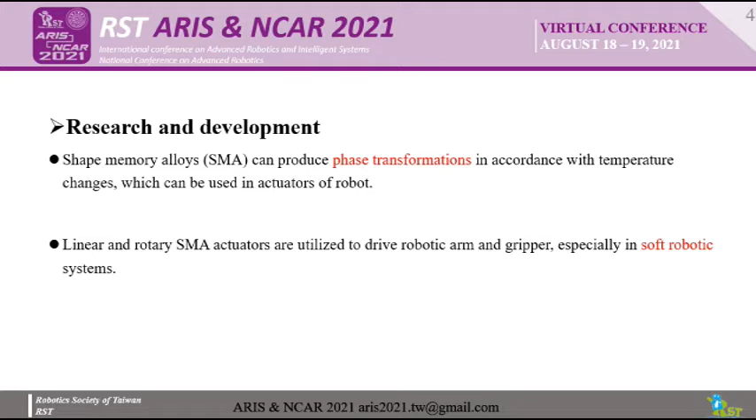Another aspect is education. In this project, students are not required to be familiar with any mechatronic system, not even any engineering field. Students need to build their own knowledge with a 3-hour-a-week lab course in a one-year project. This learning and research subject was initiated by students with proposals submitted on May 13, 2020. Students learned basic engineering knowledge under the detailed guidance of the advisor in the first 3 months. Finally, the project was completed in NCKU Optomechatronic Systems Control Lab.

Project of developing educational robot. There are 4 objectives of the project. First, explore the characteristics of SMA wire. Second, design and manufacture of micro-wire SMA actuators. Third, apply SMA actuator to a robotic system. Fourth, use Arduino and write programs to control the SMA robot.

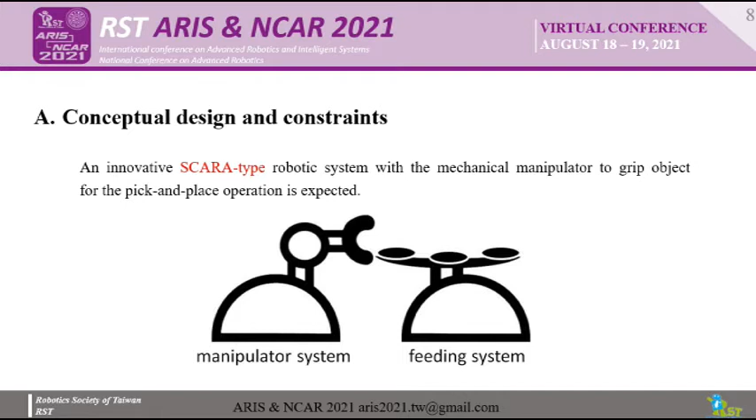About the conceptual design and constraints. Our innovative design: to decompose two-DOF rotational motion, so that pick-and-place operation can be realized by coordinating 2 independent rotational subsystems: the manipulator system, which consists of robotic arm and gripper, and the feeding system, as shown on the slide. Material constraints: available SMA wire, structural material by Lego blocks, and other materials.

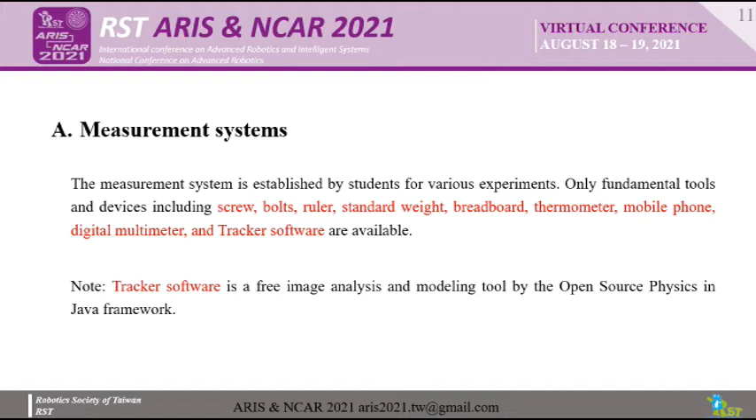Fundamental measurement. A. Measurement systems. The measurement system is established by students for various experiments. Only fundamental tools and devices including screw, bolts, ruler, weights, breadboard, thermometer, mobile phone, digital multimeter, and Tracker software are available.

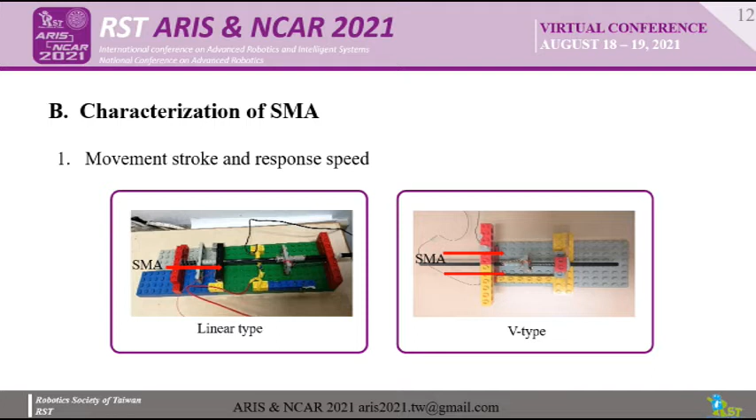B. Characterizations of SMA. First, movement, stroke, and response speed. We installed the SMA with bias spring in 2 different ways as shown on this page: the linear type and the V-type. It is found that the movement of the V-type will produce a larger stroke. In addition, the cooling time is about 3 times the heating time in the cycle of stroke.

Second, Young's modulus. For the relationship between the stress and the strain, the calculated modulus is 20.9 GPa, which is a result in the martensite phase at room temperature 24.5 Celsius.

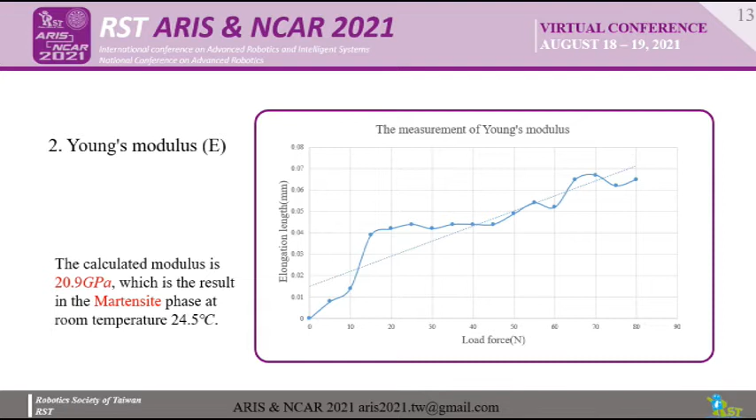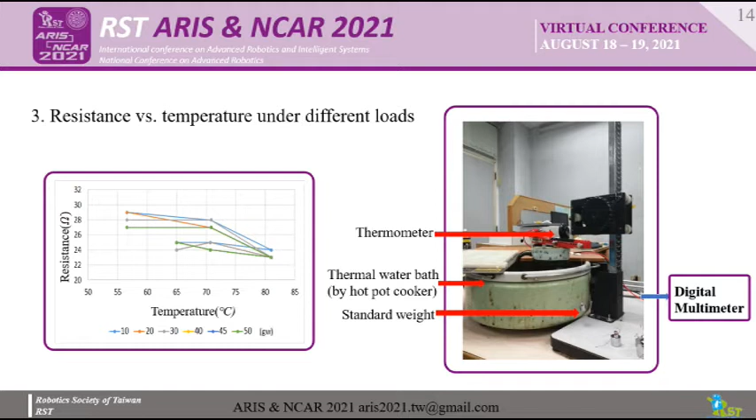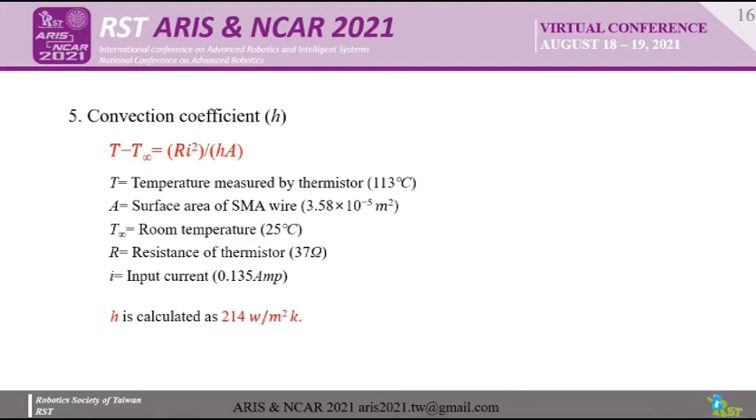Hi, I'm Wang, and I'll talk about the system design, testing, and conclusion. Innovative system design and development. The whole system includes the robotic arm and feeding system, as well as the gripper system. The first one is the robotic arm and feeding system. The structure and operational principle of the two systems are almost the same. Here, we use linear SMA and bias spring to rotate the robotic arm.

About the operation process to rotate the robotic arm. At first, SMA is heated by electrical power. SMA phase changes to austenite, and SMA gets shortened along with pulling a pulling string connected with SMA. The rotational motion is realized through friction force between the pulling string and the friction wheel.

Then, cut off the power supply. SMA dissipates heat and is elongated due to spring force. However, during one cycle heating and cooling operation, the rotational motion is limited to finite angles in a forward and reverse way. It cannot rotate 360 degrees. So, we need a mechanism to prevent reverse rotation.

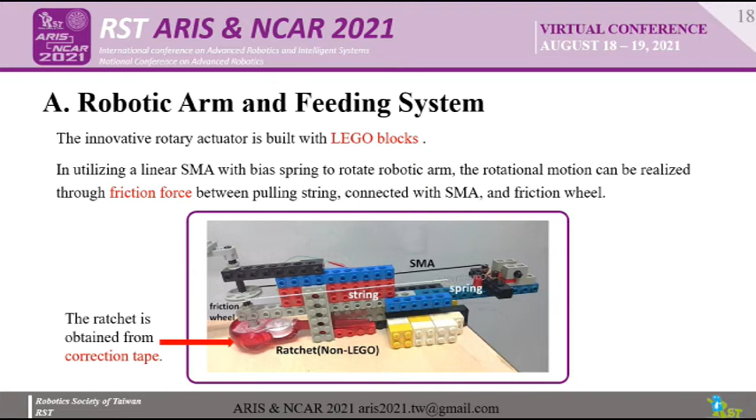An innovative approach is to utilize the ratchet mechanism obtained from correction tape and install it to the rotational shaft of the friction wheel. We construct the robot configuration and figure out both required torque and driving torque. According to Flexinol's specifications and experimental data of the spring, the maximum driving torque is calculated as 24.2 gram-weight by centimeter. For the maximum required torque, it can be determined and adjusted in realizing the robotic arm or feeding system.

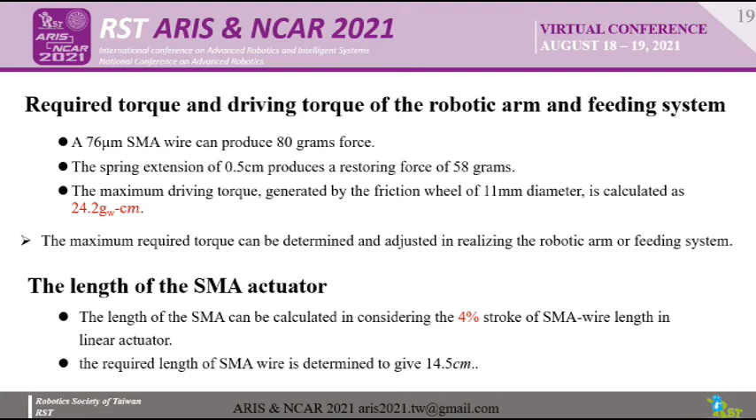About the required stroke, it is determined by the required angular displacement of the manipulator and the diameter of the driving wheel. The length of SMA actuator can be calculated by considering the 4% stroke of SMA wire length in linear actuator. The required length of SMA wire is finally determined to give 14.5 cm.

The gripper system. Use V-type SMA to drive the gripper. A normally closed gripper is proposed. In designing a gripper, the key points are opening and gripping force. The force by SMA has to overcome the spring force in order to open gripper jaws. The requirement of gripper opening is 0.8 cm.

We determine the required deformation of SMA through gripper configuration and installation of SMA. Then, the length of SMA actuator can be calculated by considering the maximum 14% stroke of SMA wire length in a V-type actuator. Finally, the SMA wire is calculated to give 10 cm for the gripper.

About the gripping force, it is determined by the spring force. With gripping force, gripper installation, and the friction coefficient between gripper jaws and object, the holding force of the object can be determined.

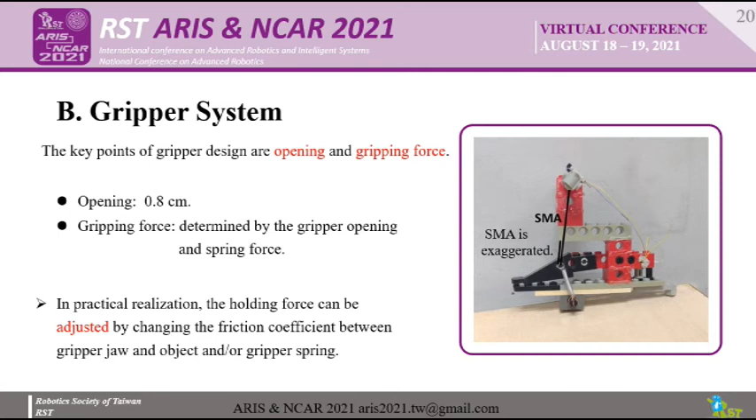Overall system. This is what the overall system looks like. We have a manipulator system with a gripper on the top and a feeding system with 3 biscuits on the feeding plate to test the system. In the first open-loop design, the system did not have photo interrupter. However, owing to SMA hysteresis, the stroke produced by each heating cycle is slightly different and cannot provide accurate position control. We change it into a closed-loop control.

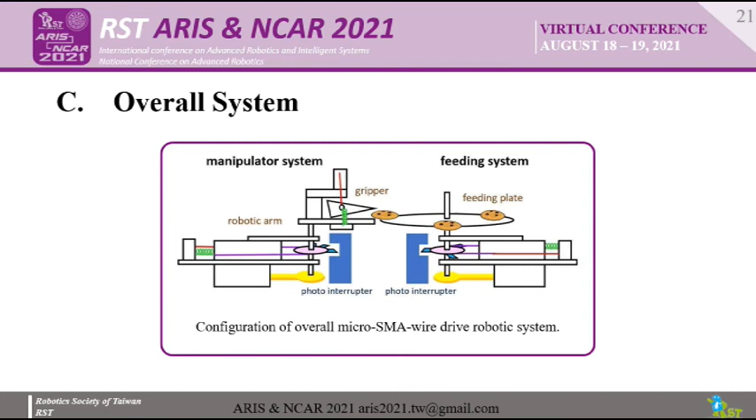We glue 3 thin aluminum strips as photo blocking pieces on the friction wheel and use a photo interrupter for the local closed-loop control. Although it turned out more precise in positioning, we still encounter some positioning error. To resolve these problems, mechatronics is employed in the synergetic improvement of both hardware and software. Here, it is noted that the installation of the third aluminum strip is very critical for compensating operational error.

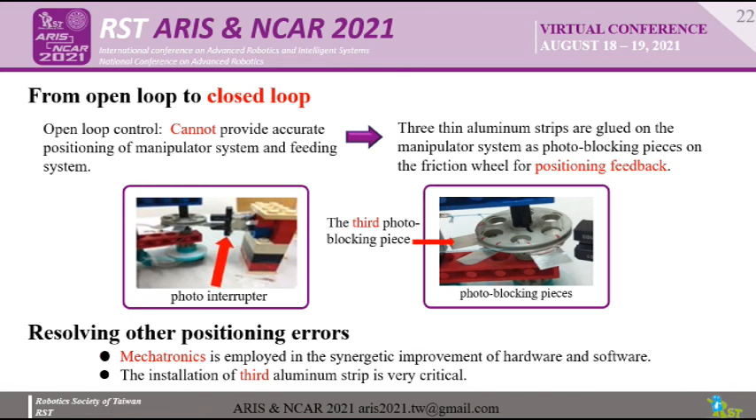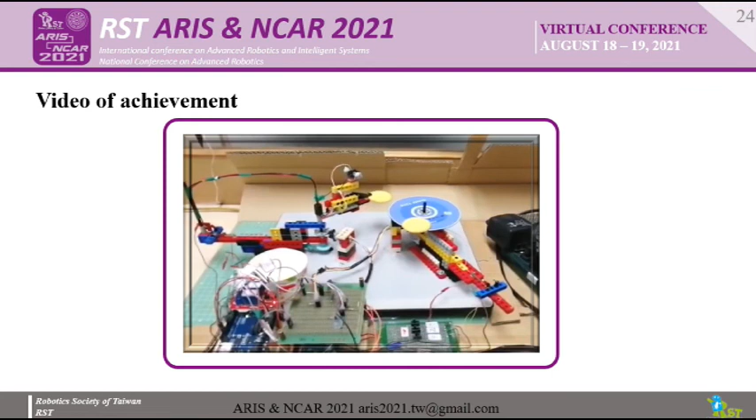Conclusion. First, a one-year educational project of 76 micrometer SMA wire drive Lego robot has been successfully implemented, and it also demonstrates that non-engineering students can learn and build their own mechatronic knowledge through performing experiments on basic properties of SMA and carrying out hands-on SMA drive robotic projects. Also, for non-engineering students, reuse and craft materials as well as Lego blocks are used effectively to reduce complex manufacturing process.

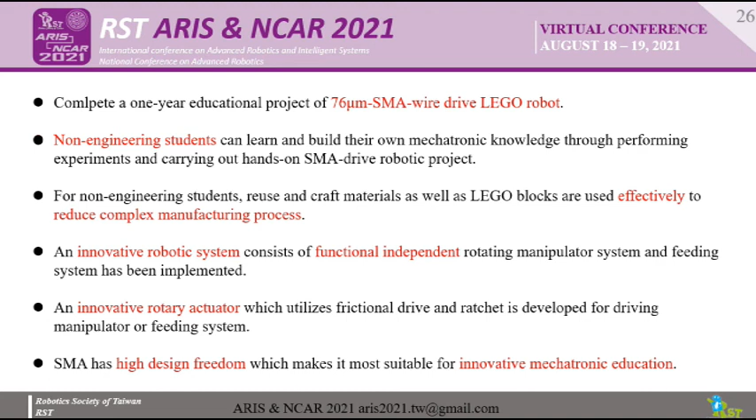Second, an innovative robotic system consisting of rotating manipulator system and feeding system has been implemented, and an innovative rotary actuator which utilizes frictional drive and ratchet is developed. Third, in the development of the pick-and-place robot, functional independence in the robotic configuration and master-slave control is of most importance to ensure successful implementation of SMA drive robot. Last, SMA has high design freedom which makes it most suitable for innovative mechatronic education. That's the end of our presentation.